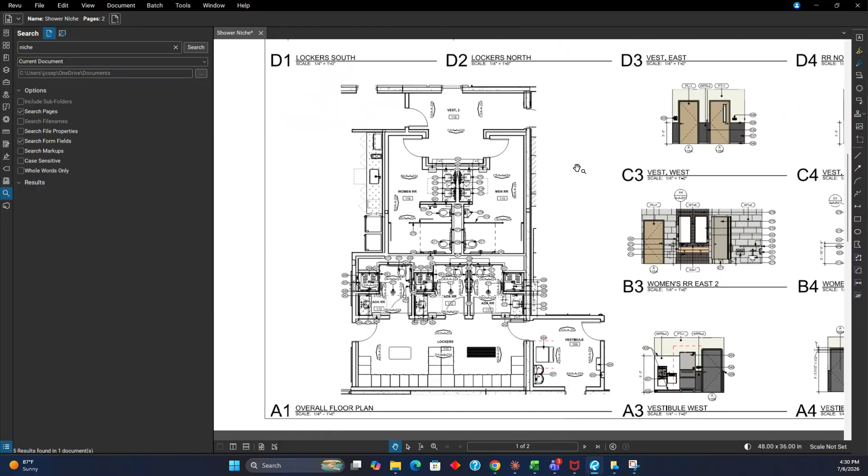So we have these showers. To be honest, I missed it the first time through on these keynotes. I missed it on the elevation, and I really only caught it on this next page. So we're going to start there, and then I'll show you what I should have seen.

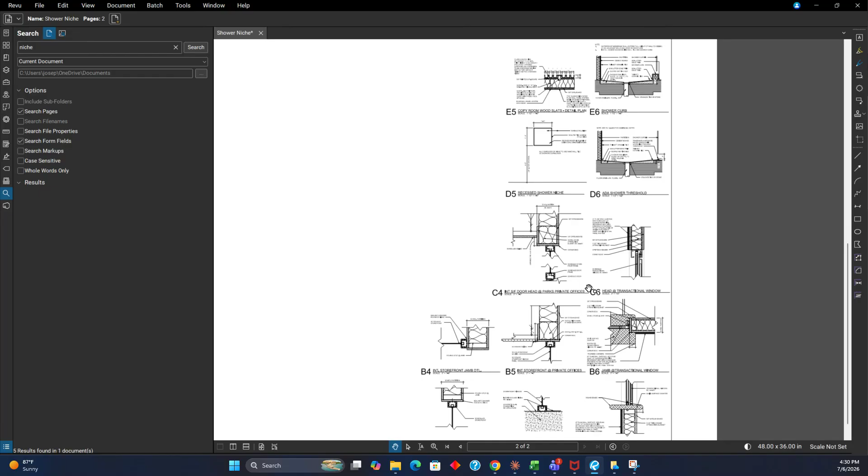So on this detail page, it was a little unusual. I even missed it here, because this is not a lot of stuff that really impacts our takeoff. A lot of it is nothing, but then you can see up here shower details and this shower niche. This is where I saw it and thought, oh man, I missed this. Let me go back and find out where this is on the plans.

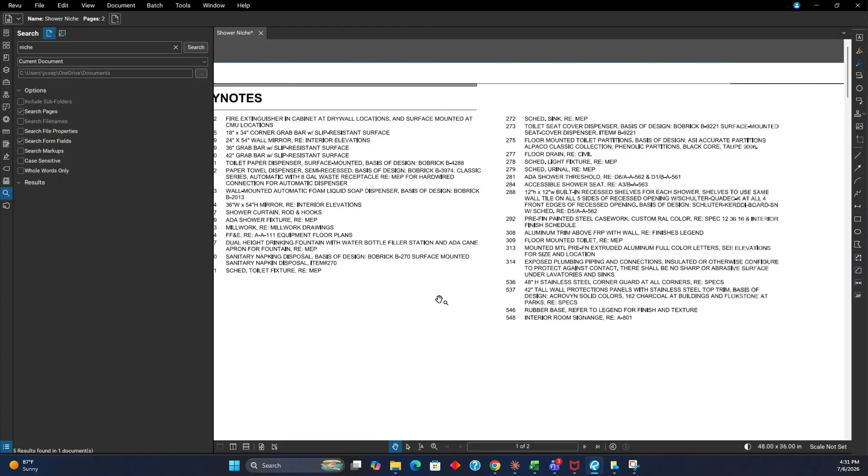So we went back. Didn't really see anything at first glance, so I started going through the keynotes, and then you can see it up here, number 288. So here's all our product info, and I thought, okay, let's go back down and see what I missed. So I went down to this enlarged view, and it's just kind of a jumble of keynotes - honestly, I don't see this a lot.

This is not normally how the plans I get are labeled. So that's my excuse for missing it. But you can see it's 288.

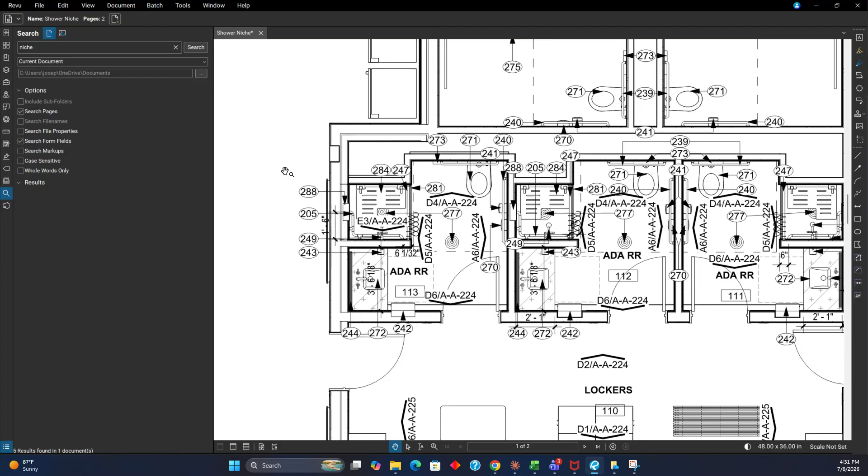I'll just cloud those real quick. You see that one, and this one - and that one's actually not drawn, but we're just assuming it all is going to match. So there's those three. So it was actually there.

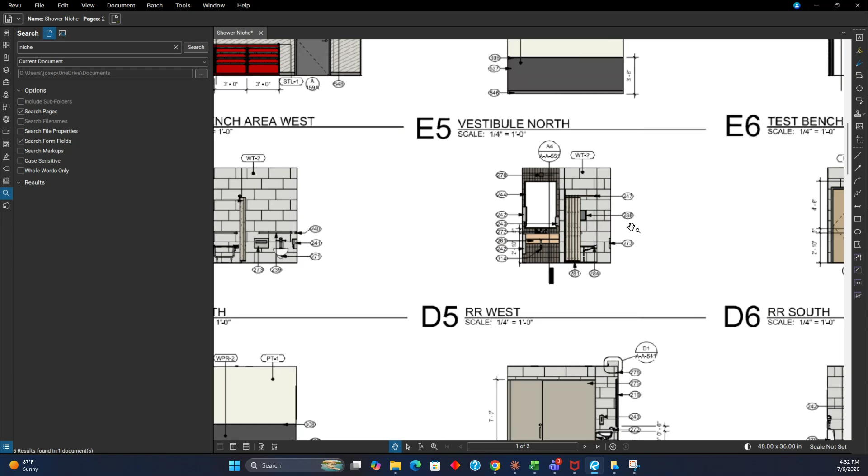And I'm like, okay, well let me see where I missed it over here. And it's over here, but it's actually kind of hidden behind the shower curtain. So again, it's all really the keynote - the keynote was doing all the work in this one.

So how do I avoid this? I've been doing this a long time and I still missed it. If you're a new estimator, this would be a very, very easy thing to miss. The best way to handle stuff like this is, one, make sure you're checking all your detail pages, even if you don't think they matter. Because again, at first glance this does not look like something that matters.

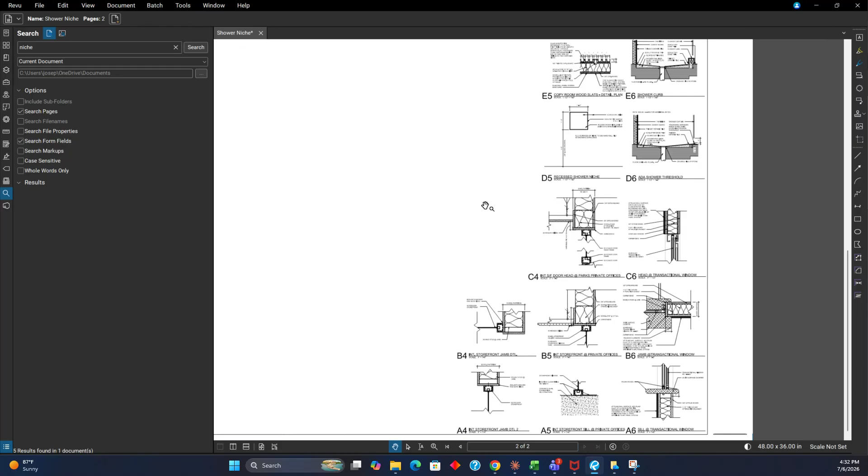But then you see these three up here - we got some shower info, some other really good info, you got your depressions, your waterproofing info stuff up top, and then this niche detail. So that's lesson number one: make sure you're checking all your pages.

And then number two, the best way I've found to minimize this - mistakes are going to happen. Maybe you're new, maybe this is your fifth plan review of the day, it's the end of the day. This is only 2 pages, but it's a 200 plus page plan set that I cropped these out of.

So there's all sorts of different factors that come into play, but something you can do is create a list of keywords and search these keywords on every job you do, whether you're doing the takeoff or reviewing someone else's takeoff. Make that list - it can be a physical list on a piece of paper, on your monitor, on your desk, or part of your checklist on your computer. Just make it part of your process and pick some words.

It's really no time at all when you think of the headache it could save you down the line. For newer estimators, unfortunately, this is just the way you learn, by missing things. Hopefully you have somebody who sits with you and says, hey, this is what happened, this is what we should be looking for, this is what we want to do going forward to avoid making this mistake again. So maybe this video could be that for you if you don't have someone in house.

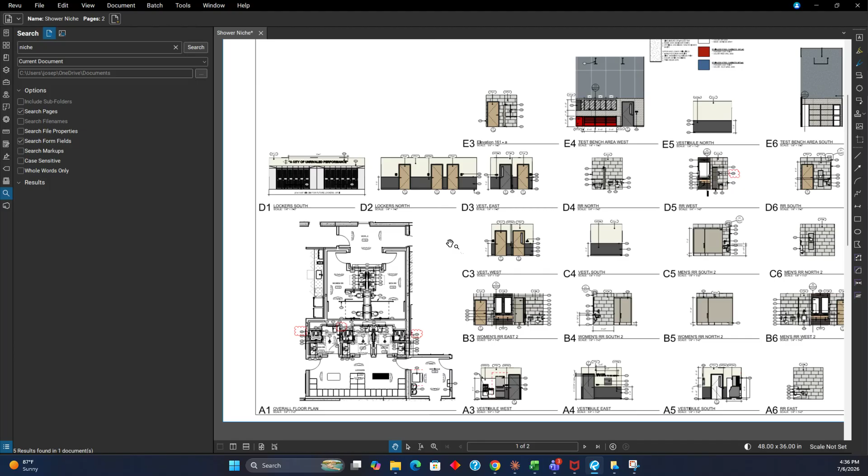I wanted to share that because I think all too often it's hard, we're just grinding, doing takeoffs, going through plan sets, and maybe we feel like because we missed something, we're not doing a good job. When the reality is everyone misses things. It's the only way you learn and get better at this job, by missing things. And the key is don't miss the same thing over and over. I don't think anyone will get upset with you for making a mistake, unless you're making that same mistake over and over after somebody has sat down with you and said, let's try this next time, this is how we can avoid this going forward. That's a different issue. But making mistakes is just how you learn doing this job.

I've been doing this a long time too, and this is something I still miss. So if you're only a couple of years in, still trying to get comfortable reading plans, this is probably something you would have missed. But again, just wanted to share that.

If anybody else has any stories or jobs, I'd like to do a video on that at some point, like our biggest misses, because I know we all have them, I know we all have stories. I've got a good one that I'd be, I don't know, happy to share isn't probably the right way to put it, but I think it'd be good to get that kind of stuff out there and let people feel comfortable that it's okay to miss things. It's expected to a certain degree, depending on your volume and experience level, but we just try to find ways to learn from those mistakes and not make the same mistakes going forward.